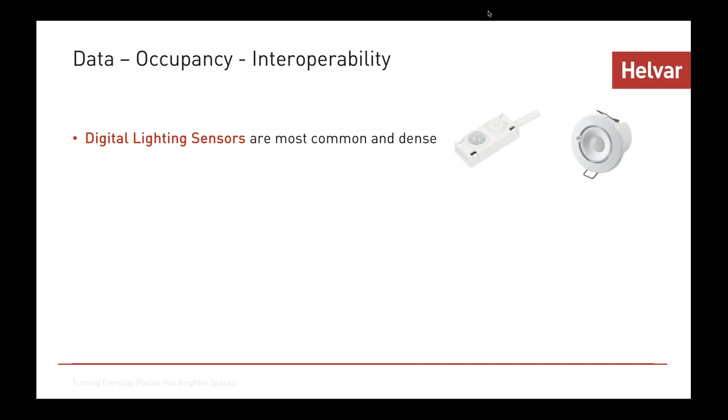So the first one, energy management. What we saw earlier, certainly in automated buildings and smart buildings, is that there are sensors everywhere, and lighting sensors these days, especially if a building is going for LEED or BREEAM, are the most common, and therefore they're best placed to give us occupancy data. Really understanding how that space is going to be used is the key to optimizing it in terms of efficiency. So we can use those sensors to make sure there's better productivity, better efficiency in terms of energy saving, energy management, but also for the people using the spaces.

We can find out why spaces aren't being used and correct that. Even if spaces aren't being used, we can sell off or rent out that part of the space. And certainly, if we know how spaces are being used, then we can improve the well-being of the people using the spaces.

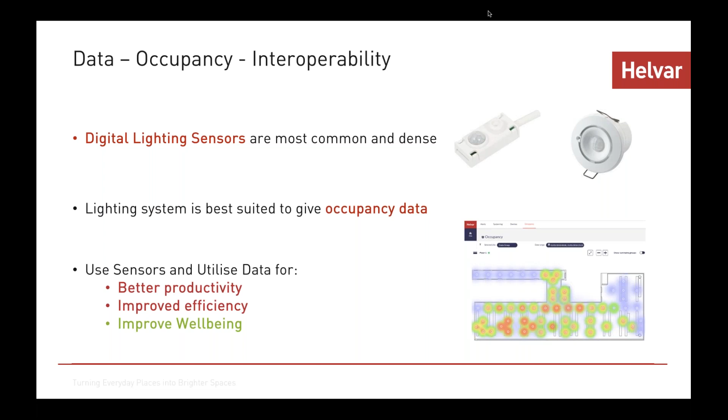So this is a great slide if you want to explain to people how this process works. The first thing to do, as I mentioned through the lighting sensors, is to collect the data from the space to understand what's happening. If we don't understand what's happening in the space, if we don't have the data, then we can't do anything about improving that space.

The next part is to refine that data and create value from it. Data in itself is not much use. We need to use our expertise to refine that data, to create value from it, and then make sure we utilize that data to interact with the other building services so they work collaboratively to improve energy saving, optimize the building services including the lighting, provide a better user experience, and positively impact well-being in that indoor environment.

So to recap, it's about sensing the environment, it's about creating value from the data we collect, and it's about getting that data and using it to interact with the other building services.

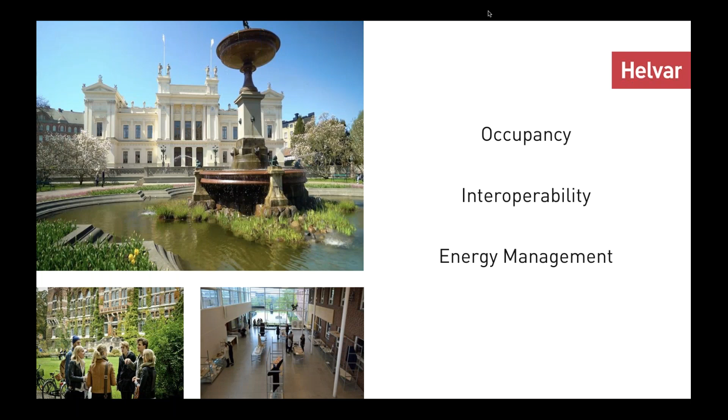When we've done that, it's about making sure that all of those building services are working together to positively impact energy management, energy saving, optimize lighting, provide a better user experience, and improve well-being. So to give you a real life example, we talk about some university projects where they're actually utilizing lighting sensors and collecting occupancy data across the building services to reduce energy consumption.

These days, probably wherever you are in the world, people are trying to save energy. With the advent of LED, lighting uses less energy than ever before, which means the climate control system is now one of the greatest users of energy in buildings. To give you two examples of quite huge campuses: they're required to halve their energy bill by 2025 in one instance in Sweden, and by 2030 for one in the UK.

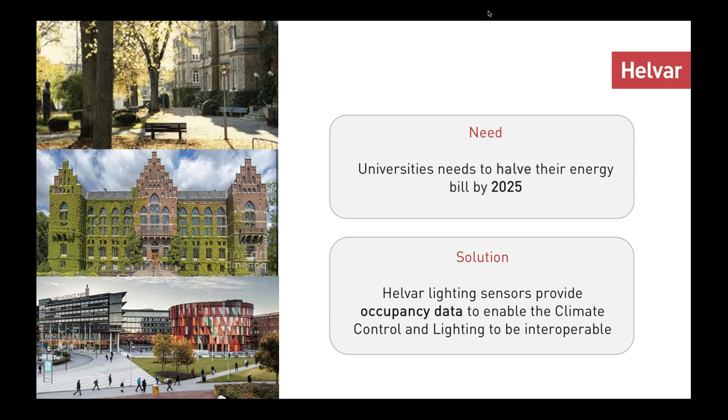As I said, they're using lighting sensors to collect occupancy data across the building services. This is a real example from Bristol University in the UK. Most times when building services go into a building, including lighting, it's commissioned, it's programmed, and then it's left. It's not particularly optimized for the ongoing usage of the space.

So in this case, using our Helvar Cloud Gateway, we collected data on how certain spaces were being used on this campus. We can see the one on the left-hand side was one room where the PIR off time was set to 30 minutes. We then collected the data and recommended that timer be reset to 6 minutes, and nobody would notice the difference. That turned out to be the case.

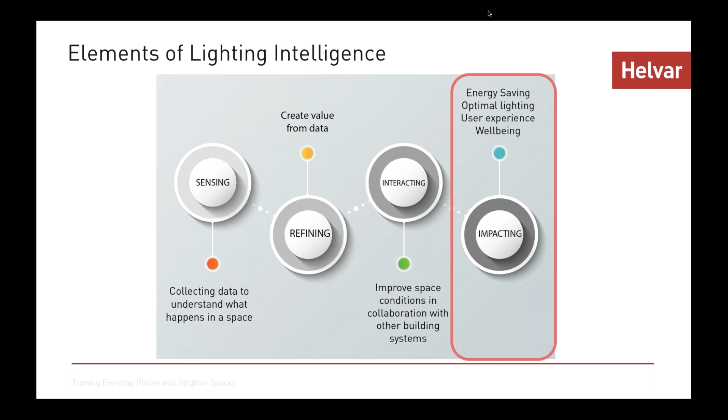It's the same thing about making the building, the room, the space within that building the most efficient. It's still about collecting the data, knowing how the space is being used, creating value, making sure the sensing technologies are interacting across the building services for maximum impact in the space.

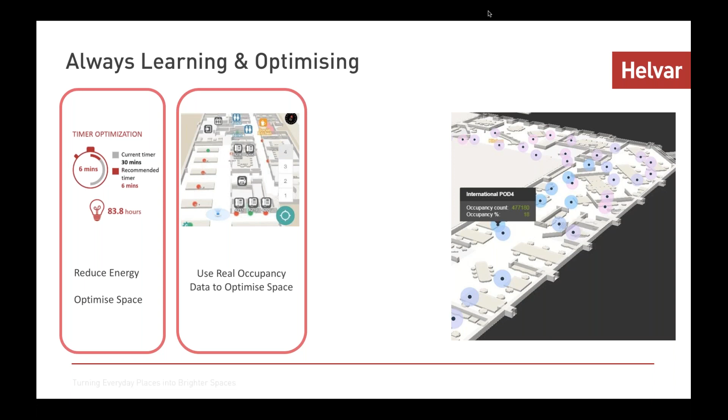Are certain spaces in the building used more than others? Why is that so? Is it because the lighting is better or worse? Is it because the temperature is too warm or too cold? Is it because there's more natural daylight and people like it? Is it because it's the canteen and people like to hang out there? Really understanding how the space is used allows us to optimize those spaces for the benefit of the users.

And really importantly - this is a message that's slowly starting to get out into the world - these days sensors are digital, and there's no reason that one digital sensor in the right place, in the right scenario, can't be used to optimize the other building services. So we get rid of this silo mentality of having one sensor for lighting, one for climate control, one for security, and so on. It's absolutely vital to get the message out there, to ask the question: if the sensor is digital, how can I use it across the building services?

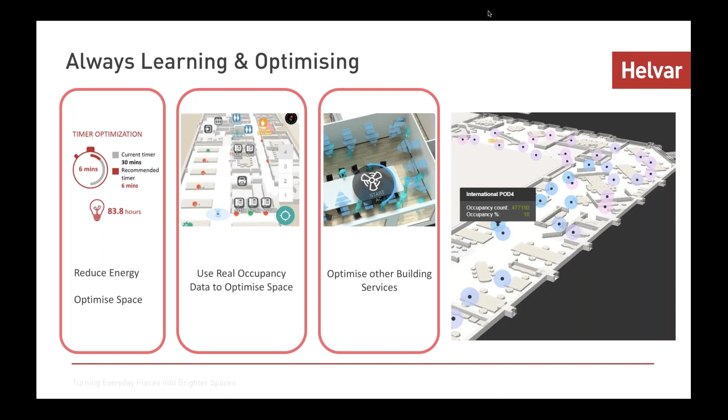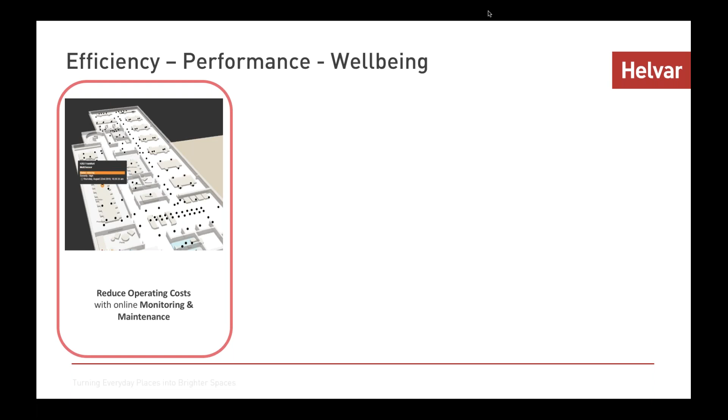One aspect of the building is reducing operating costs to make sure the building is working at maximum efficiency. Because our lighting system utilizes DALI and digital sensing, we can collect data from that system, find out how it's being used, whether there's a failure of a product, and do something about it. We can present that data on a floor plan, color-coded, or send an email or text to the facilities management team, reducing their operating costs and keeping the building working at maximum efficiency.

I briefly mentioned earlier about occupancy data and how to improve building performance. We're starting to see this more and more, thankfully, in modern buildings, particularly new builds, but we should start to see it more in retrofit and upgrades too. So utilizing that digital lighting sensing technology to really understand where people are in the buildings at any given time, and how long they're staying there.

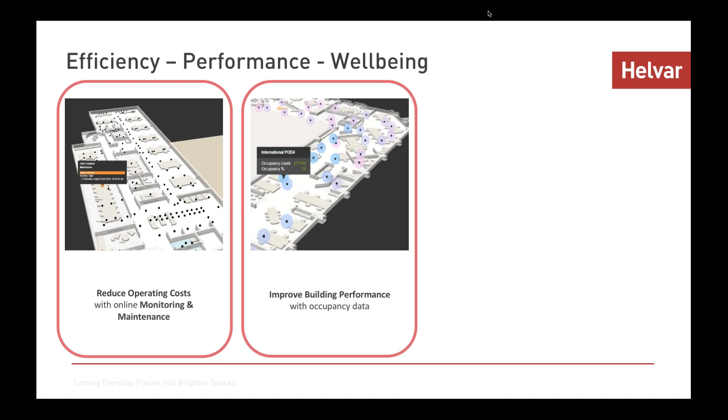The other aspect is that once we have that data, it can be used to design better buildings of the future. So many buildings now are designed with a percentage of occupancy in mind, with building services running full power from maybe 6 in the morning to 6 at night. Once we have data from one building and understand how it's being used, we can utilize that to improve things going forward.

Last but not least, improving user experience and well-being within indoor spaces, utilizing occupancy data but also the lighting system, making sure we're utilizing the dynamic aspects of DALI. There is DALI Type 8, which is the industry standard for lighting. Through DALI Type 8, we have the possibility to modify light intensity, color temperature, and color throughout the day or at set times, which means the indoor environment replicates the outdoor environment in a dynamic, positive, and healthy way. We'll take a look at how to do that later on.

Something a little more technical: when thinking about how to implement this in buildings, whether new build, retrofit, or refit, it really doesn't matter today whether you're discussing wired or wireless. The outcome has to be a system which maximizes efficiency, optimizes the space for the owner and facilities manager, and provides positive health and well-being. Let's not let the technology stand in the way of those outputs. From Helvar, we can supply wired and wireless systems that deliver all of those aspects of the building.

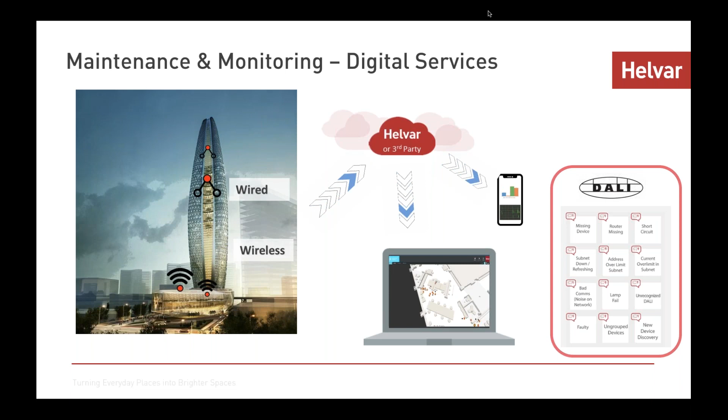DALI is the only industry standard for lighting, and built into DALI is a lot of data. We can utilize that data across all the aspects I mentioned, whether it's maintenance and monitoring to keep the building optimized and efficient, or getting occupancy data to fully optimize the spaces, especially if you're tenanting a building. So that's efficiency.

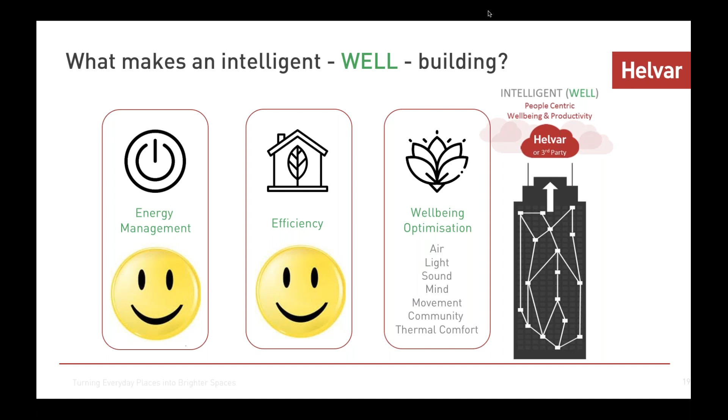Lastly, we'll touch on well-being. For those who joined yesterday, we mentioned well-being in more detail, but just to remind you, the well-being aspect is absolutely crucial. Understanding well-being means understanding how the ambient conditions around you are affecting your health and well-being. What we're starting to see now in some parts of the world is designers and investors designing buildings with LEED and BREEAM or other certifications, and in parallel, starting to take into consideration the WELL standard, which means we're finally starting to build buildings for the people that are going to use them.

The WELL standard has 10 concepts, and I'll briefly run through them. Air: making sure there's access to good quality clean air. Water is essential for life, so access to good clean water at all times. Nourishment: making sure we have access to good food to keep us running at maximum efficiency as human beings. Light is absolutely essential for life, and good quality flicker-free light, preferably dynamic light, maybe using the Helvar light-over-time feature, which changes intensity and color temperature in line with natural circadian rhythms.

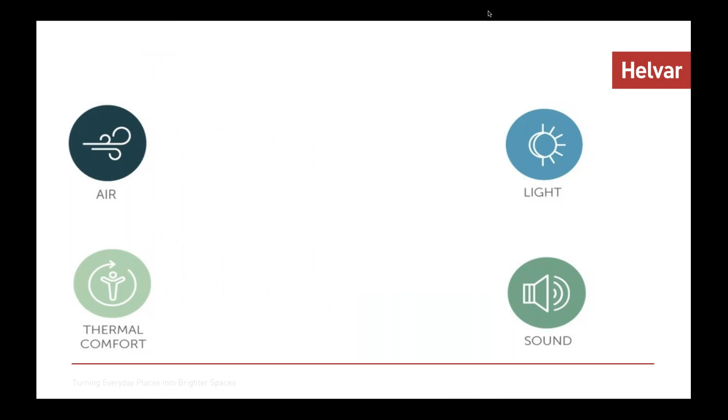What we can also see from a technical perspective is that I talked earlier about getting these building services to work interoperably. So, for example, if we have a light sensor, the question is, can that light sensor be used collaboratively with the air conditioning system, the climate control system, the heating system? Can the data from that sensing technology be used to influence how those other building services are used?

And the answer in many times is yes. Ideally, they would be doing that interoperably within the room itself and not via another layer of systems integration. But certainly this is an area that we're seeing huge gains on a monthly basis within our industry.

Of course, I mentioned light. We're in the lighting industry, and we know that light is hugely important. Human beings are intrinsically linked to light. It tells us when we go to sleep, it tells us when to wake up. But on a more intrinsic level, on a more human level, it also affects our mood.

So it's not just about the visual aspects of the light. The color temperature, and the right color temperature at times of day, can really affect how we feel and affect our mood. It affects more at a physiological level than a visual level.

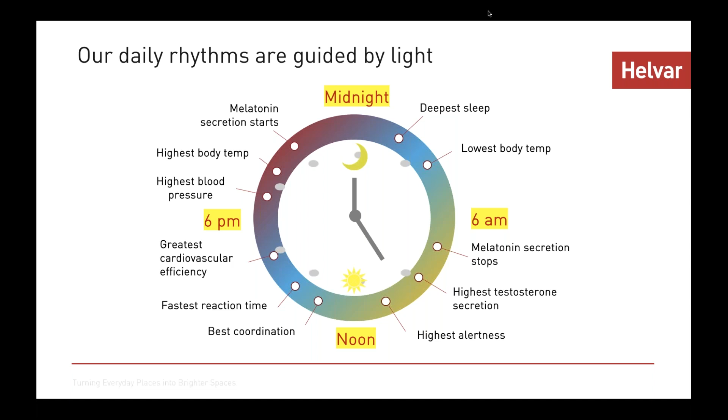Using, for example, the Helvar system with the intelligent color feature within Designer and utilizing DALI, we can now really put into practice dynamic lighting in the workplace, in the learning place, or in the factory, where very subtly throughout the day we can change intensity and color temperature to really mimic what's happening outside in the natural world in the indoor environment.

And again, from experience, I can tell you that those people that have put dynamic lighting into office workspace environments or learning environments, it's a completely different feeling from a fixed lighting environment. Of course, it has to be flicker free, good color rendering, but really using dynamic lighting is more natural than using fixed lighting in indoor spaces. So check out the Helvar Intelligent Color and Light Over Time features.

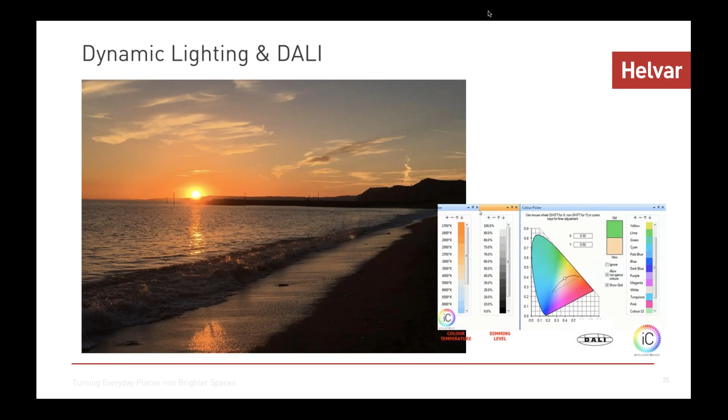The applications where we can really start to see that dynamic lighting has an impact is, for example, in healthcare environments where we need people to relax and recover, so we would have a lower intensity, warmer light color temperature. In the office environment, to energize employees, we use higher intensity levels with a more cool white color temperature, which is more energizing, just like a summer's day is more energizing.

General activities and tasks, so making sure that we've always got the right light level for the right task. For example, using Helvar sensors, which have constant light control to make sure that we always have the right lux level on the working plane, and we can modify that throughout the day based on ambient light conditions.

And then, of course, for productivity, whether it's in the factory environment or whether it's in the learning environment, making sure that we have enough light to allow people to work, and making sure that light intensity is modified to the ambient conditions, but it's a cool white to energize the people who are trying to learn or trying to produce whatever they're trying to produce.

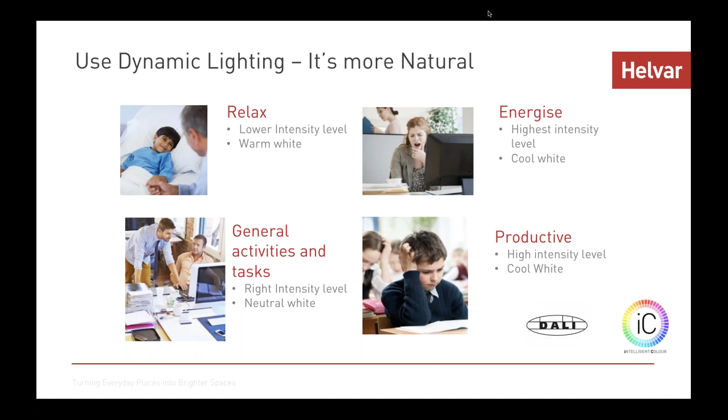So the message here is that fixed lighting is a thing of the past. The technology allows us to modify intensity for task lighting, for example, but also color temperature to affect mood in different applications. And again, have a look at the Helvar system with its intelligent color feature, and take a look at DALI, which I remind you is the only industry standard for lighting.

So the challenge is, I guess, to ensure that we can link building efficiency, building optimization, and more importantly, the well-being and user experience of those occupants. We have the 10 concepts of the WELL standard to help us and remind us of what those indoor environments should be delivering to us.

And then we can see that through intelligent lighting, through the use of industry standard protocols, we're able to provide that light part at the very least of the well-being concept through intensity control, color temperature control, and color control. We can do all of that by making sure that the building services are working interoperably. We can guarantee the quality because we're only using industry standards. And through use of intelligent lighting systems, we ensure that the sustainability of that building for the benefit of those users is guaranteed going forwards.

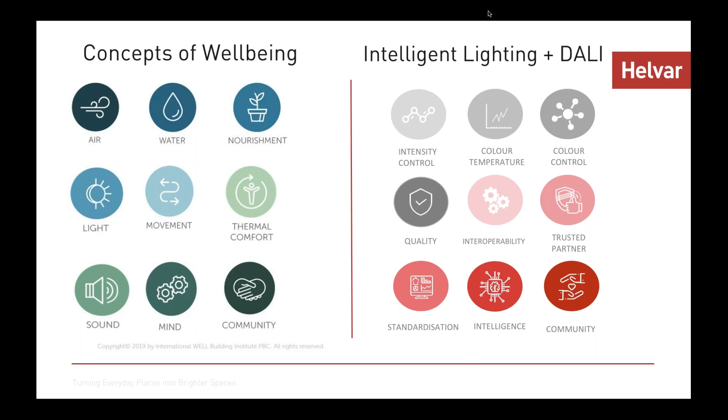So we've covered today energy management very briefly. We've covered building efficiency and human efficiency within the indoor environment very briefly. And we've covered well-being optimization. And what's really great is that we don't need different technology to provide these things. It's all from the same building technology.

So it's all about turning everyday places into brighter spaces, of course. It's about using intelligent lighting and smart sensing. But mostly it's about getting people to ask different questions. So how can that smart sensing work interoperably with the other building services? How can that smart sensing positively impact the health and well-being of the people using the spaces?

So that brings this webinar to a close, and I'm here for any questions you might want to ask.

Thank you, Alan. Let's see what questions people have. So, there's a great one here. How can people be better when it comes to designing buildings?

I think that the design of buildings is changing. I've been in this industry for quite a while, and it used to be quite conservative, and there was a standard way of working, so lighting designers did what they did, MEPs did what they did. I think with the better communication and better education, the decision-making process of what lighting and what building services is